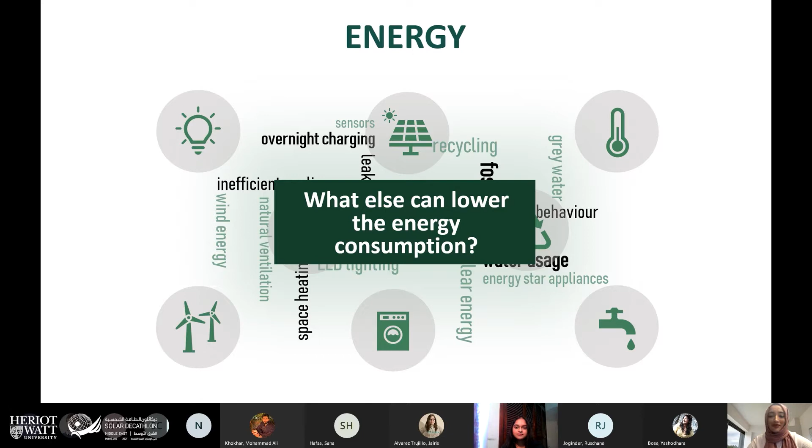Yes, Nathan. All right, so thank you guys. So moving on. Now that you know about energy, let's move on to the energy and sustainability milestones. So starting off in the 1950s, when the first solar cell and first nuclear power plant was built, this was actually an introduction towards clean energy resources rather than just using fossil fuels.

Then in the 1990s, US Energy Star was introduced, which is actually a benchmark where in appliances such as any equipment that you buy, maybe an oven, a microwave, any coffee maker, you would see the Energy Star rating. That would tell you how efficient it is, and that would help you reduce electrical bills as well.

Then in the 2000s, LEED accreditation was introduced, which was used to assess a building's sustainability in aspects such as construction, retrofits, operations, and maintenance. Then by 2010, LEED was used in more than 140 countries, which became a benchmark, and we use it nowadays as well. And there are a lot of versions that keep coming up, updating it to the latest energy trends.

And another achievement in 2010 was the US and UK had more zero carbon sources producing energy than fossil fuels. So it was an introduction to any other source other than fossil fuels, such as coal. So now in the future, the global target is to reduce greenhouse gas emissions by 40% compared to 1990s levels. This would help with the Paris Agreement goal by the United Nations.

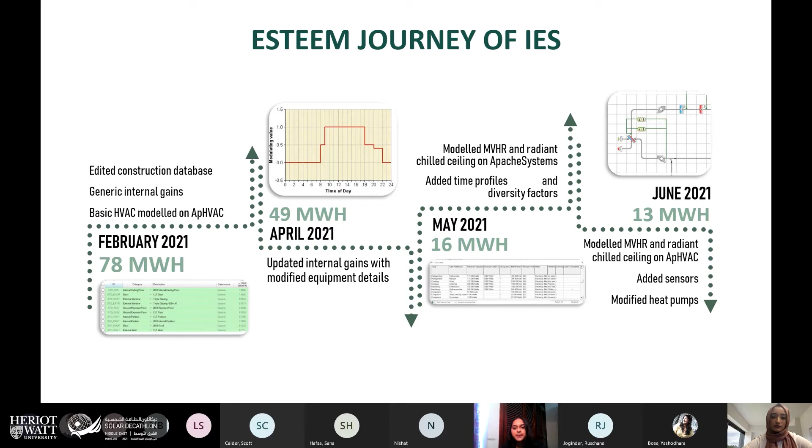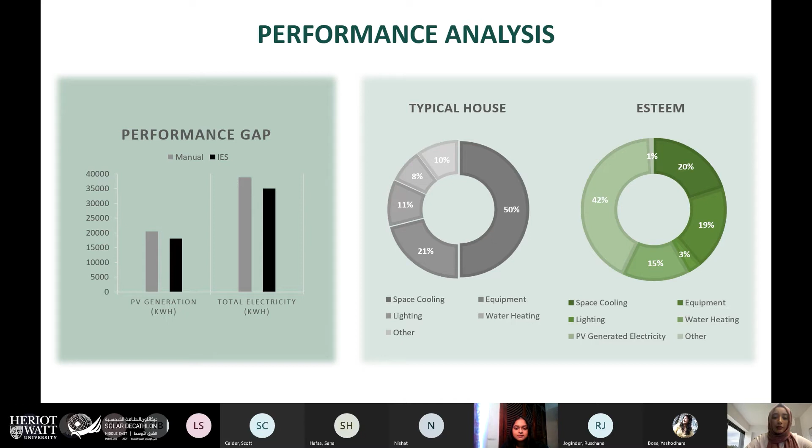And you can also notice that we have 42% contribution from renewable technology that you wouldn't have in a regular house. And that would save a lot of energy because of on-site generation. And yeah, so that's the performance gap and how IES works. And now we'll do a quick demo of how you can also optimize with just basic input.

So we have two models. One is the base model, which Vinuki will be explaining. And then we'll move on to the optimized model, which shows you the basic input that we can just change, and you can also try it out. Here is the base model that we have created beforehand. In ApLocate, you can change the location of your model. Currently, it is set to London, UK.

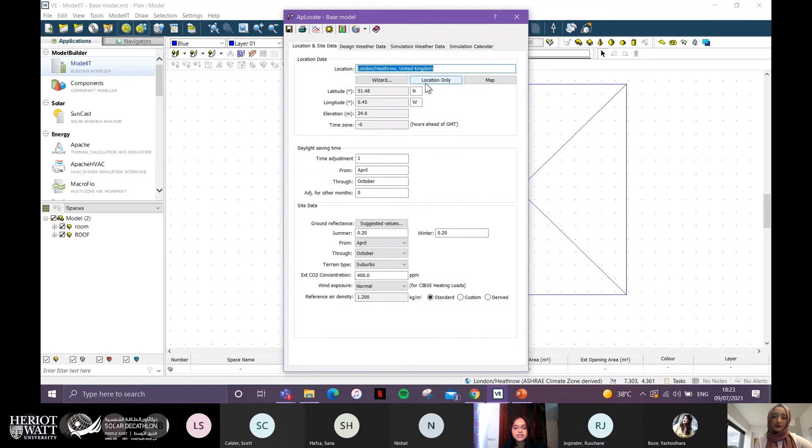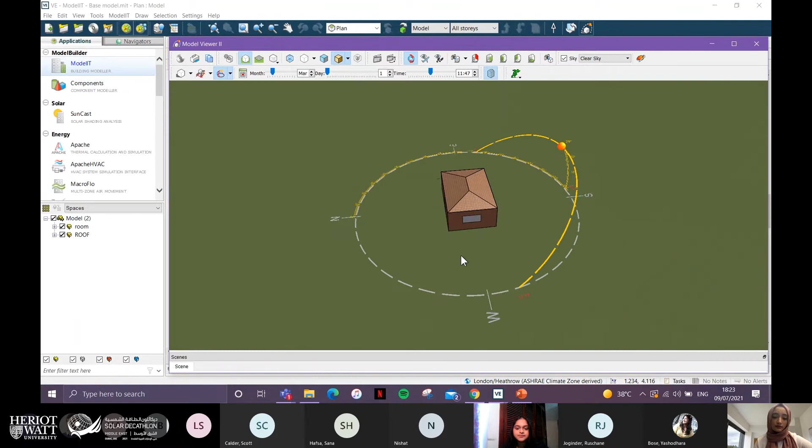If you go to Model Viewer, the full model can be seen in a render view. Here, the windows are located on the south and west sides. The sun path diagram shows that the highest solar radiation comes onto the south and west. So this is our full model. The model was created by clicking on extruded shape, where you can type in the plane, the height, and the width.

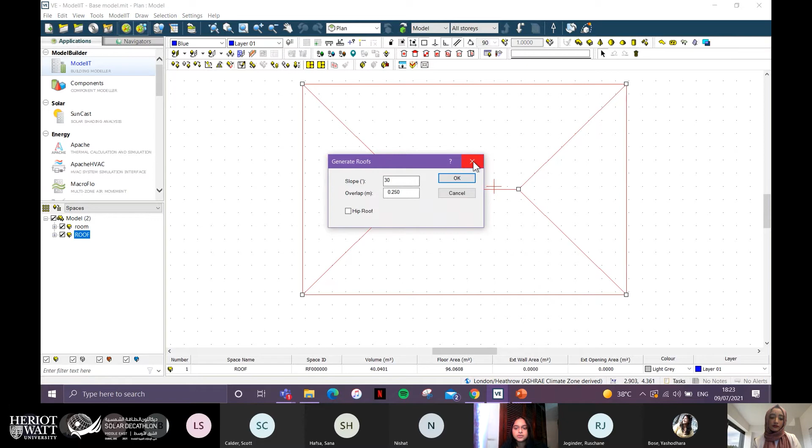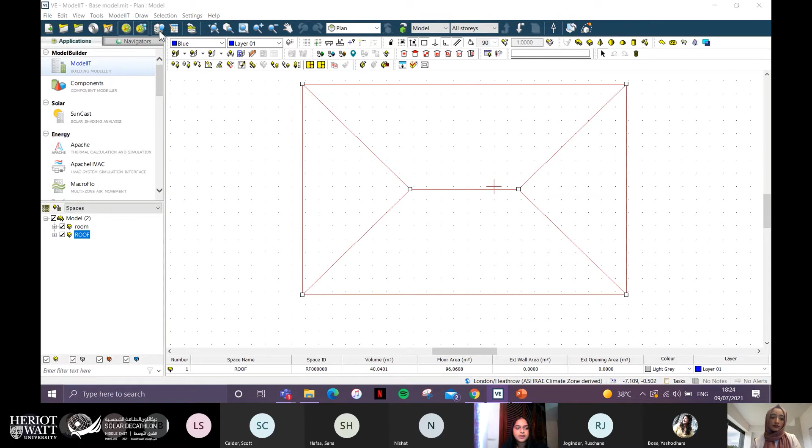The roof can be generated by clicking on generate roofs, where the slope can be typed in. The windows were created using this, where the base height, the width, and the heights can be typed in. The doors were created using this, the same way as the windows. Holes can be created inside the space when there are adjoining spaces. And then onto the building template manager. It takes a few minutes to load.

So here are the templates that will be used in our model. You can add in construction materials, MacroFlo, thermal properties, and lighting properties. Onto the construction, the roof and the wall have no insulation, hence heat can be transferred inside and transferred outside faster. For the window, a single pane glass is used, as seen here. Hence, there will be high energy transfer through the glass too.

And then onto the thermal template. As you can see here, the HVAC model was modeled in ApacheSystems instead of Apache HVAC, which is less accurate. The heating and cooling profiles are set to be on continuously, and the DHW consumption is set to be 60, which is higher than usual.

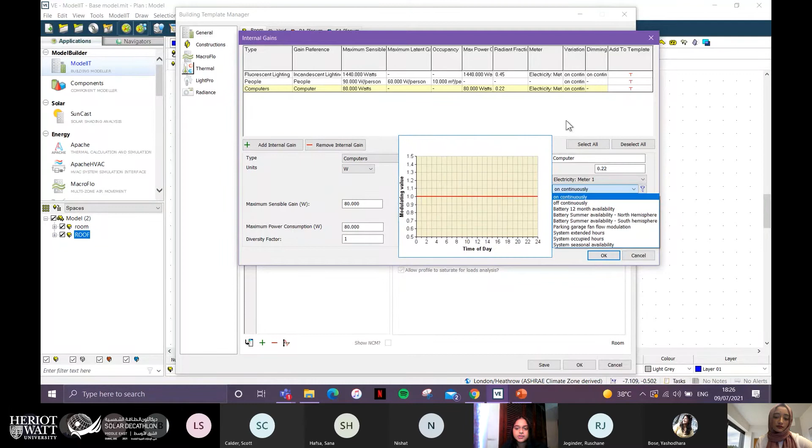For the internal gains, the lighting is set to have incandescent light bulbs, which are the highest energy-using light bulbs, and it has 1440 watts. There are 10 people modeled in this house, and each person is going to give away 90 watts. There's one computer located also, and we have put a typical value of 80 watts. As you can see here, all the internal gains are set to be on continuously, so it can give the maximum heat gain.

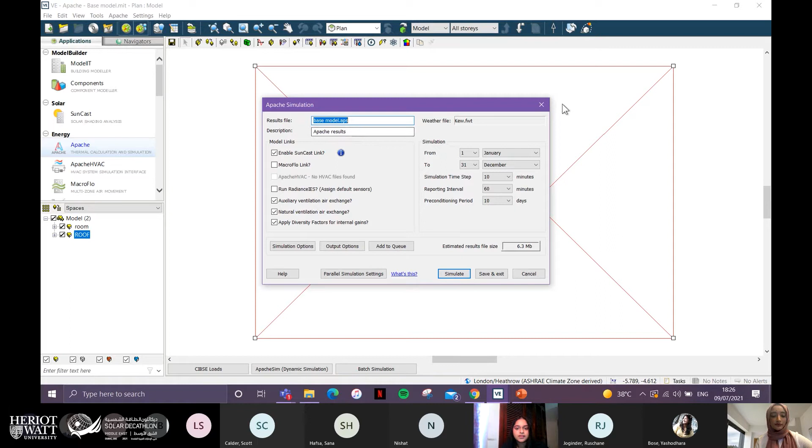And then onto Apache, where you can assign the templates over here, the thermal templates, general templates, and the construction templates. Here you can simulate after adding everything in. We have simulated it beforehand, where you can see the results in Vista Pro.

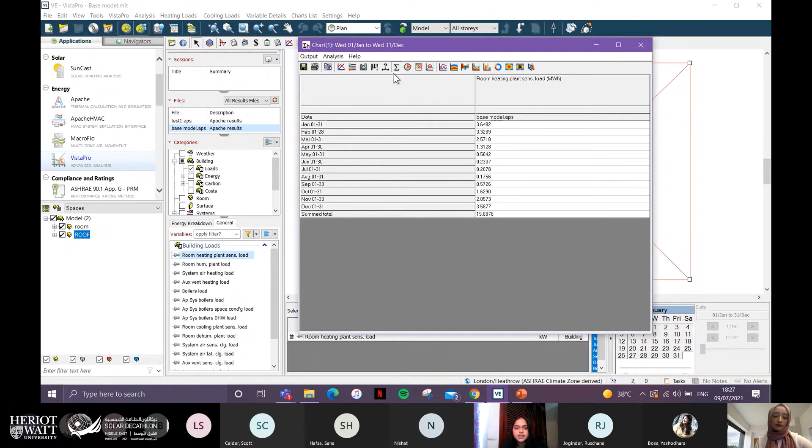So the total energy we got was 19.9, as you can see here, which is really high for a space that is this size. And in loads, if you go to room heating plant sensible loads, which is the heating loads, as UK uses heating the most, you can see here that the highest peak is 9.4 kilowatts in December, which is a lot higher than the usual. Now Mahnoor will show you the optimized model of this version.

All right, so you guys can type in questions as well if it seems confusing for now, just so that after this, we can help you figure it out as well.

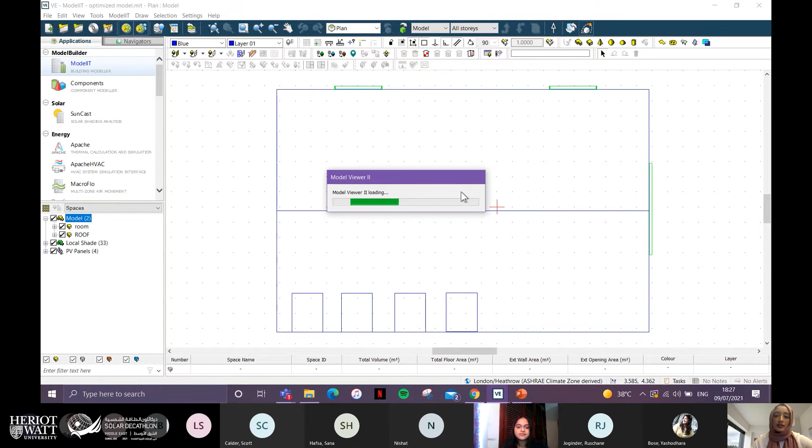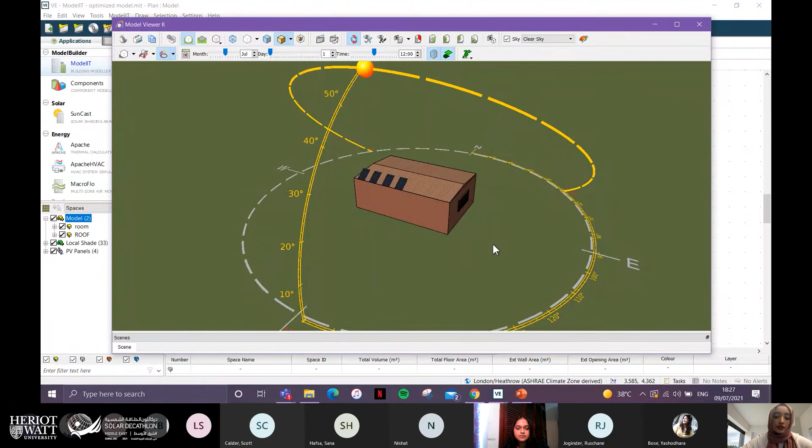So we'll go to the geometry to show the changes we made in the optimized model. Starting from the roof itself, it is much flatter than the previous one because apparently whenever we model roofs, the flatter the roof, the less thermal gains it has. Then moving on to the solar panels, we placed 4 solar panels to show how renewable technology works on IES as well. And considering UK's sun path, you can see that there's more solar radiation towards the southwest, which is why the solar panels are placed there.

And the glazings have been moved from southwest to northeast because we would want to avoid the thermal gains and solar radiation as well, and minimize solar thermal gains as much as we can. So that's from the geometry bit that we changed. And we'll move on to the construction. And it takes a while to load.

All right, so in construction, Vinuki mentioned earlier that there was no insulation and we used default values. But to show you the importance of insulation within materials, for roof and external, we added insulation layers of 100 millimeters. And you could see that earlier the U value, which was 2.4, is now 0.23. And for the external wall, it was 1.68, that is changed to 0.93. This means that the thermal resistivity has increased and less heat would pass through, less colder heat would pass through.

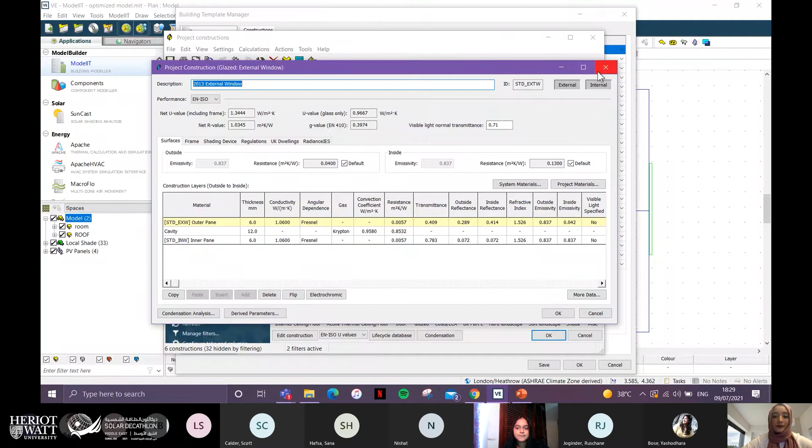And for the external window, earlier it was just a single pane, but in this, we made a double glazing with krypton as a gas filled within the cavity. Krypton helps to slow down the thermal conductivity. So the U value of the window was quite high. It was 5.6 before, and now it changed to 1.34 just by changing the composition and adding a gas to it.

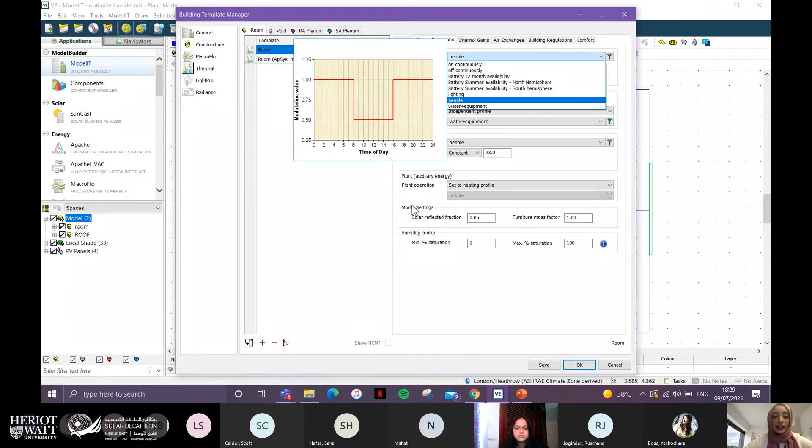So after changing the construction database, we'll move on to the last bit, which is the thermal. So when you go to the thermal template, earlier you had seen that it was on continuously for all the systems, right? But now we had created time profiles to show you how realistically you're supposed to model. And you could see that it's at 0.5 capacity at sometimes, and otherwise it's full. And you can tweak it according to the building space and timings.

And you could also see that for the domestic hot water, it was 60 liters per hour, but now we changed it to 45 using CIBSE guides for an energy efficient building. And we have also assigned it another time profile. And now to the internal gains, which is the most important part as well. We're using LED lighting, which is the most energy efficient source. And before, the previous lighting system was around 1000 watts, but this has lowered down to 240 watts.

And sorry, I think, yeah. And then for the people, we had used CIBSE guides again, which reduced the sensible gain per person to 80 watts per hour per person. And the last bit, which is the computer, we're using an Energy Star rating that we mentioned, and the computer just provides sensible gain of 55 watts, which is much lower than a normal computer that you would use.

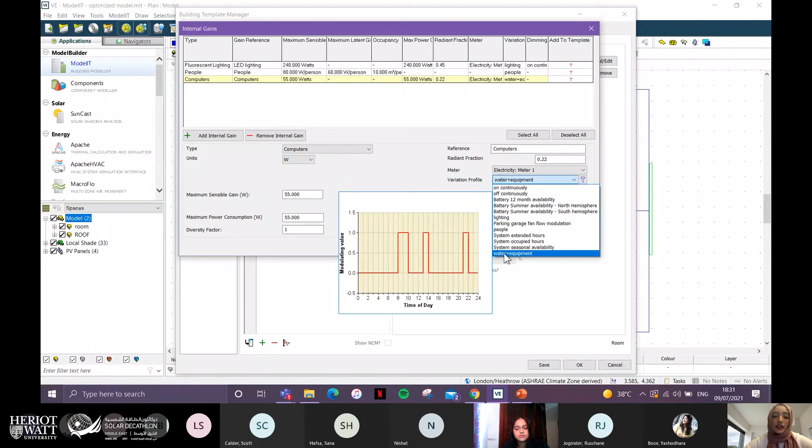So after adding the internal gains, we have the time profile. So as you can see that Vinuki is showing, there are different time profiles added. And even for the water and equipment, you wouldn't have it on throughout the day because again, that's just wasting and not in use. And you just tweak it according to the consumption. So yeah, we made the time profile changes, added the internal gains, the construction, and then we ran a simulation again.

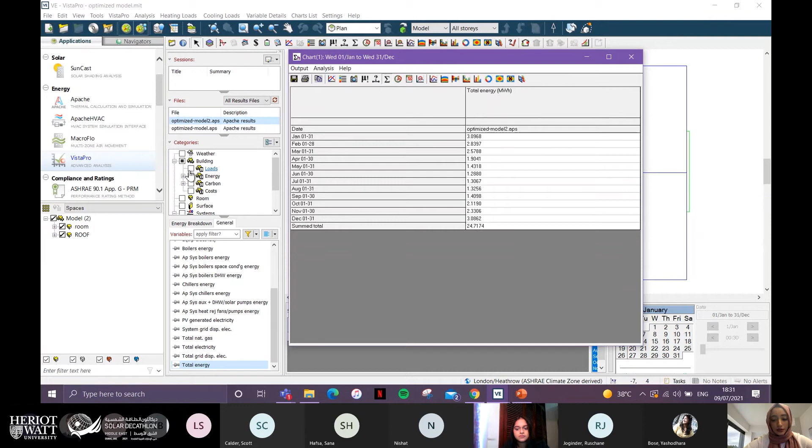And you could see that the total energy has now become 24 megawatt hour, and the heating load, as it's UK, it has also decreased. Keep showing. Yeah, so the peak heating load in December has become 7 kilowatts, and that's the difference there. You would see the difference on the last slide as well. And now Vinuki would show how we're using that in ESTEEM and how our current ESTEEM model looks using Apache HVAC. Let me just open it.

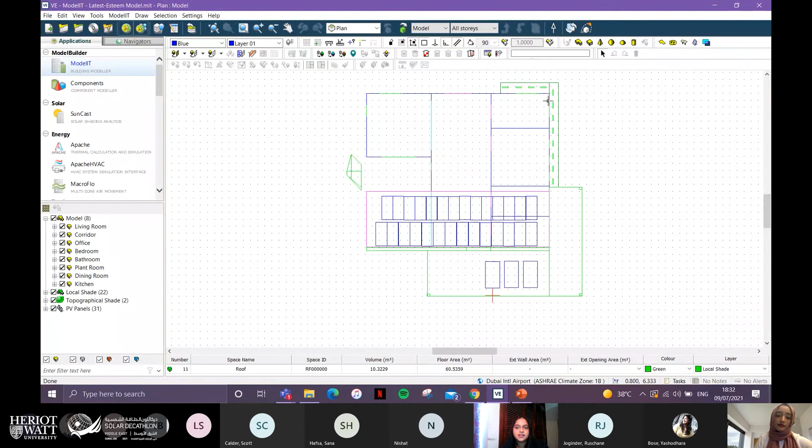So here's our current ESTEEM model. If you go to model viewer, you can see all the components in our model. You can see the solar panels, the solar thermal panels, the wind catcher, a small courtyard, the windows and the doors, and also the shadings around it.

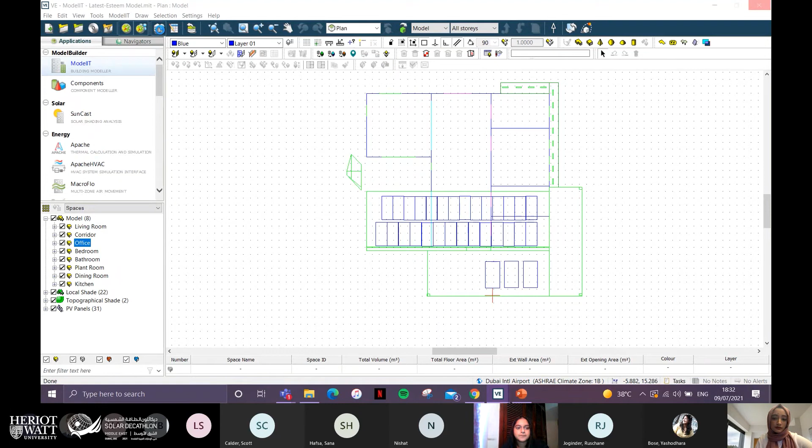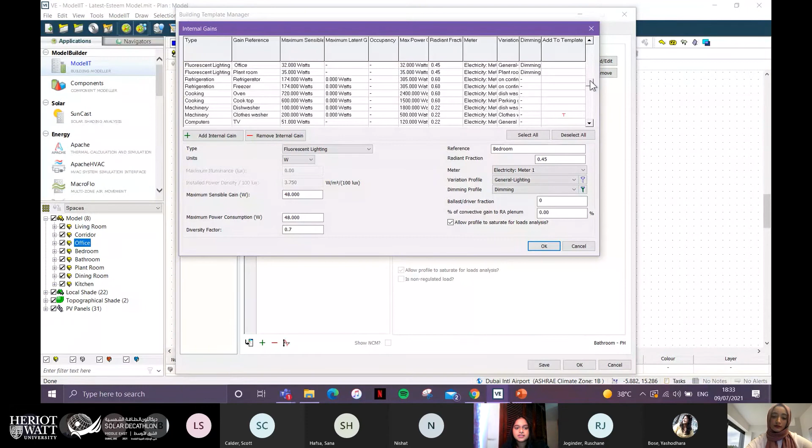If you go to the building templates, we will show you the thermal templates of our ESTEEM model. Takes a while to load. Yeah, so we used Apache HVAC to make it more accurate instead of Apache systems. And the set point for cooling is 23. As you can see, it's different from the UK set point as heating is not used in the UAE. For internal gains, we have added various internal gains, and we have also added various variation profiles to best represent the competition time.

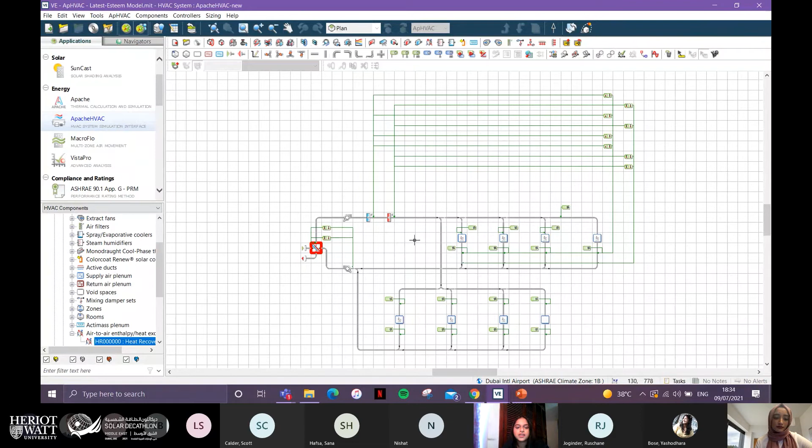And then our result, the Apache HVAC system, is shown here. Here we have the sensors. Here we have our rooms, dining room, kitchen, corridors. Here we have our cooling coils and the heating coils. And then the supply fan, the extract fan, and then the heat exchanger. We're still going through the HVAC model to make it as accurate as possible. And now we will show our last slide where we will conclude our symposium.

All right, so Habiba asked if it's cost efficient or not. In the long run, it definitely is cost efficient, because it's more sustainable compared to other systems, and as an end user, your electricity bill is going to reduce as well. So it's always a benefit.

I'm just trying to load the last slide. Sorry.

Okay. So to basically summarize how important IES and the inputs we just discussed are. Starting off with orientation, you noticed how putting the glazing on south and north had a huge impact because of the solar radiation, and adding shading devices as well. We had shading on the glazing, and using renewable systems, you saw that 42% contribution in the ESTEEM model has reduced the energy much more.

And in the construction database, we showed how U value has an impact because it shows how much thermal conductivity a material has. Followed by heat gains, how efficient the equipment is. You saw that we used Energy Star rated appliances, and also LED lighting. And the last bit is system set points and time profiles. Before it was on continuously, but after we changed it to accurate and realistic timing profiles, it reduced the energy consumption by a lot.

Okay, cool. Guys, you can drop in more questions if you have. Until then, I have another one. What attributes does the IES tool cover? I'm sure you already covered half the points in your presentation, but would you like to shine some light more on the other attributes that the IES tool covers? Okay, yes, I would just go on that slide. So it's mainly all of this at once. It depends on how you actually model it. So maybe you could just check out how the solar works, or you could add in the internal gains and see how that works as a whole.

But the main attributes of IES would be how energy consumption is, and small detail that you wouldn't really get from manual calculations or another software. So it has comfort analysis, and the main part of IES I would say is the HVAC system, to know how much the building services contribute. So yeah, I hope that answers the question as well.

Yes, definitely. So Ruschane has asked a question. What are the limitations of IES? That's the same question we've received in the form as well. So bang on, Ruschane. Any drawbacks or limitations of IES? The limitations would be the geometry, where you can't model it like in Revit or AutoCAD, and you can't move it around. So that's a big limitation.

Yeah, and I would like to add on to that. Another limitation that we faced personally was Apache HVAC, where you might think you're modeling it right, but you always have to cross check to make sure the systems are right, the sensors are right, because that's the technical bit of it. That's one of the limitations I would say. You need to know more of the technical side for it.

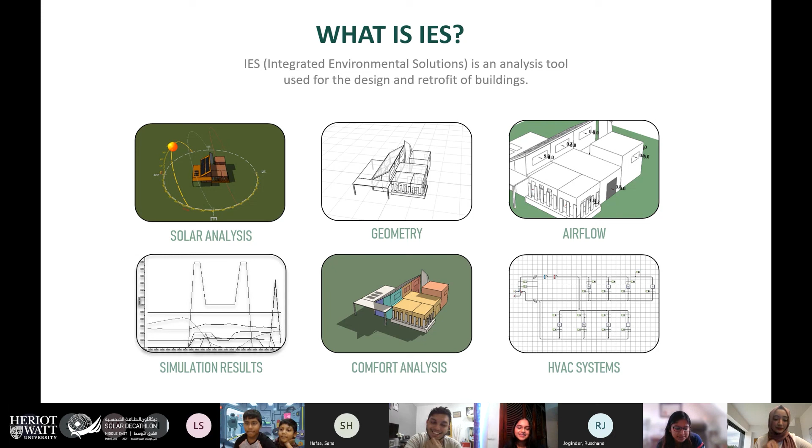Manu, can you stop sharing the screen so that I can get everyone on the same screen? Okay? Yeah. Everyone else, if you could just turn on your cameras, that would be nice. Hi Riz, Scott, Sana, Ruschane. So many smiling faces, I love smiling faces.

Okay, I've clicked my print screen a lot of times. I hope the screenshots have been taken. Otherwise, I don't know, my laptop is just always hanging all the time. But thank you guys for turning on your cameras.